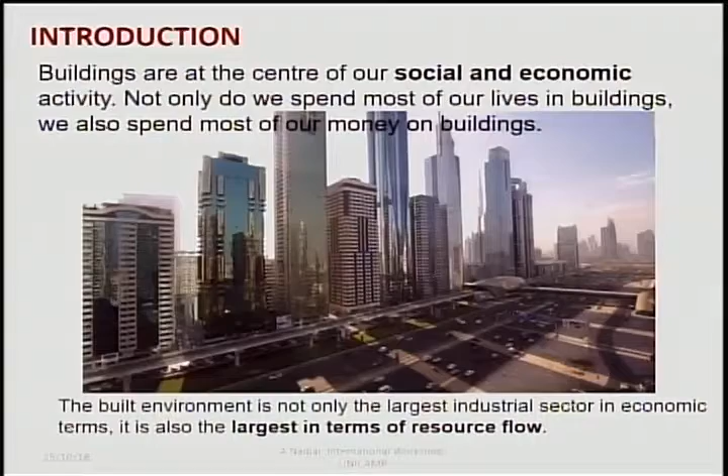If I start with the introductions, buildings are the center of our social, economic activities. Not only we do spend most of our lives in building, but we also spend most of our money in building. The built environment is not only the largest industrial sector in economic terms, it is also the largest in terms of resources flow. So most money goes in the built environment.

If we come to fire, it is recognized as one of the major threats of life and property in many countries. The primary goal of fire protection is to preserve life safety, because life safety is very important and it's a priority. A second goal is to protect the property, safeguard the environment, property, business, running business, activities, and safeguard the environment in order to make it healthy and, of course, important for the generation coming over.

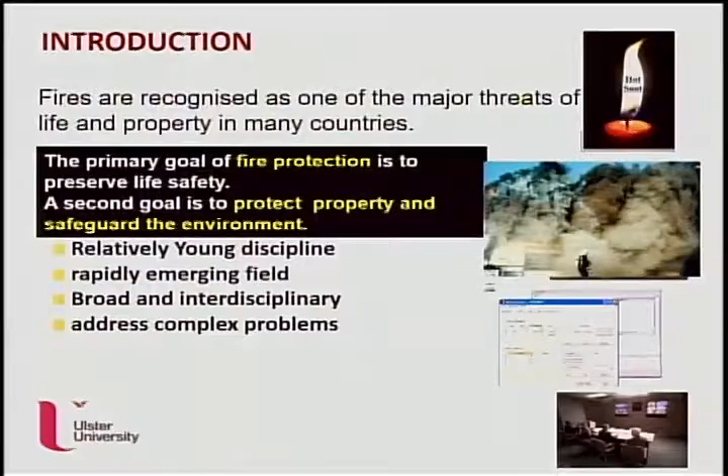If we take fire itself, it's a young discipline, rapidly emerging field, because the fire can cause a lot of damage and can sort of way change the policy of the government. It is broad and interdisciplinary, because it comes from physics, chemistry, engineering application, and addresses complex problems, because you're talking about heat, flame, and also how the fire spreads. The economic impact of fire in buildings has been estimated at 1% of GDP, a vast sum now exceeding 10 billion a year. If you compare earthquakes and flooding to fire, you can see that fire is causing more damage compared to the others, and more investment and protection has to go to building health and fire safety.

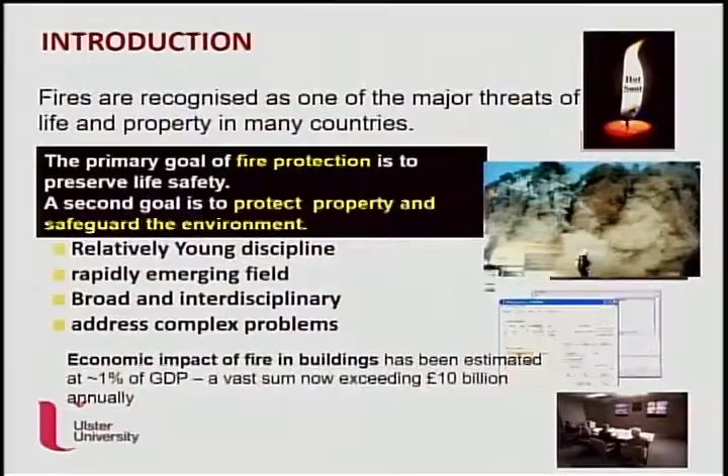I think you are aware about this, and we are all aware about this. So it happened just recently: an incalculable loss of a 200 year old institution, the Museum of Rio, gutted by fire. It is a nice building, but there are so many questions. Why did the fire happen? And how did the fire start, where exactly? What was the ignition? And of course, how did it spread from one block to another. In a way, the fire was localized, but couldn't be constrained by the fire resistance doors, windows, and roof, and of course it spread all over the building.

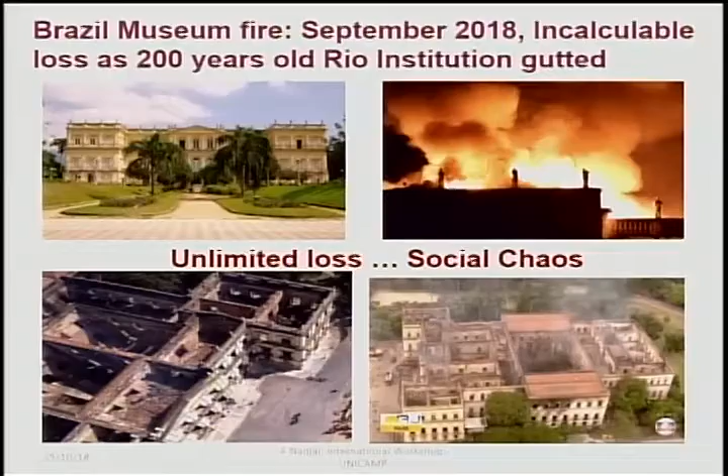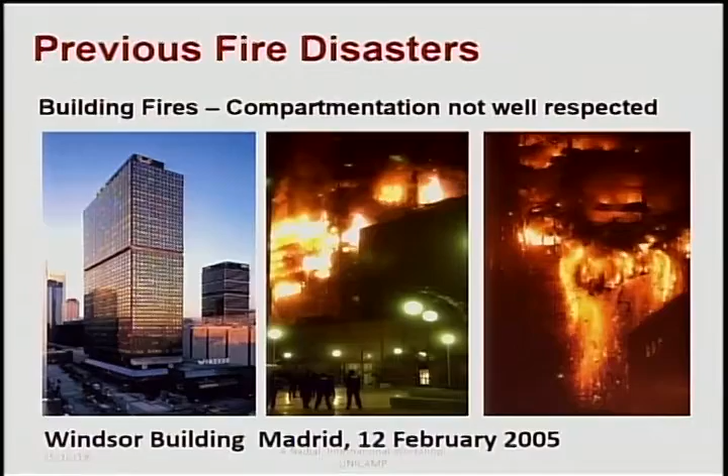If we come to the regulation, I think this is a fire that happened in London in 1666. It is funny to see the 6 3 times here. So you can see the regulation started to recognize things and take action on something else.

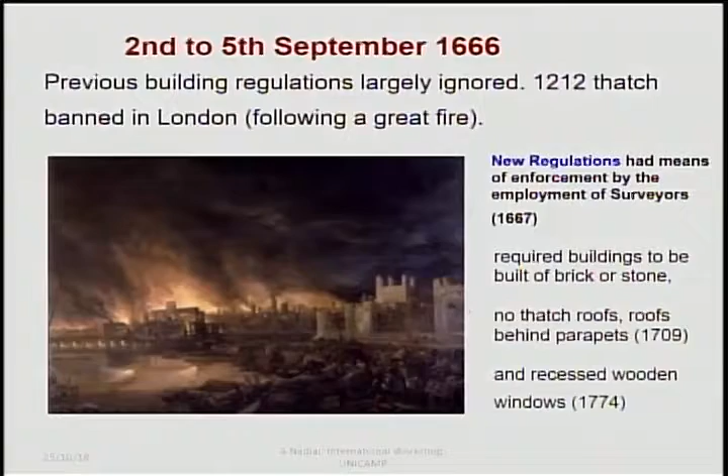You can see in 1212, thatch was banned in London following the Great Fire. The thatch, like in the roof, they put what you call dry leaves or dry branches to make the roof, and this has been banned because the fire can strike any time and spread from one house to another. So the new regulation had means of enforcement by the employment of surveyors in 1667, and required buildings to be built of bricks and stone. So you can see the decision here - long time ago, they knew one of the materials that can stop fire from spreading is stone and bricks. So they decided early on, this is the main material which can save lives.

No thatch roofs behind parapets, and recessed wooden windows from 1774. So you can see to produce a document or a code, it takes some time and it's not straightforward.

Legal liabilities. Regulatory reform, fire safety order, responsible person, fire risk assessment of general fire precautions, competent person, enforcement by fire authority, problems. What about our qualification? What about our skill? What about our competency? Evaluation. So there are so many questions we could ask about what happened in these two buildings, or maybe the previous building as well.

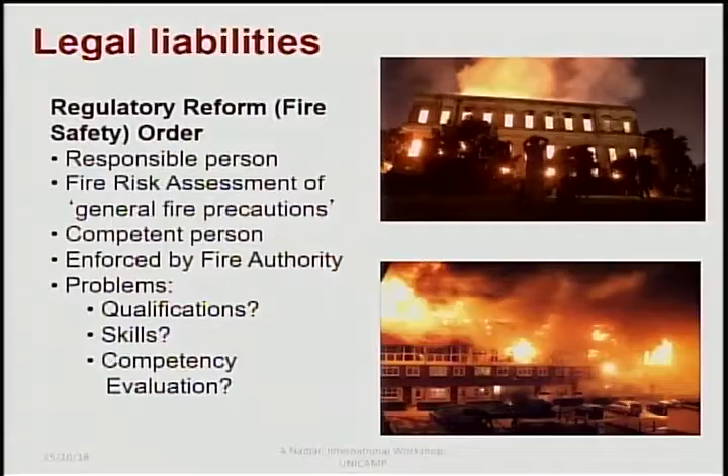As we said, in 1667 the British government decided that masonry and stones would be the main elements to be used in construction. So masonry material has been successfully used for the construction of fire-resisting elements since the need for fire protection became apparent. Just an example here.

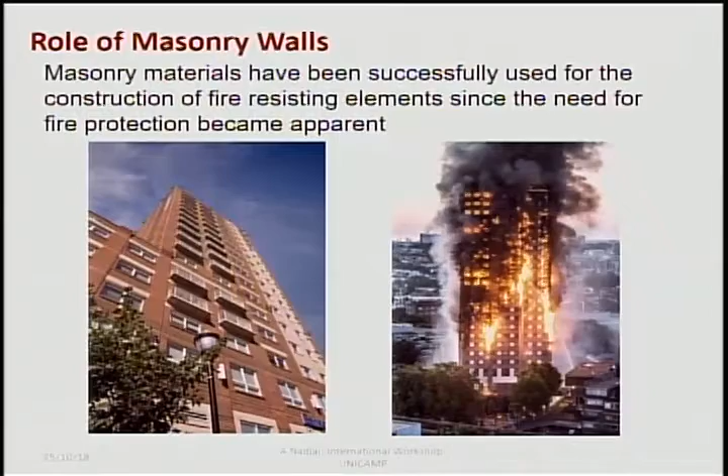The role of masonry is in a compartment - it divides one block from another block, and of course it has been engineered to act as a fire barrier. So fire may strike one room, but it cannot move to the other room because of the barrier of the masonry, serving to compartmentalize the fire, to constrain the fire, so it does not spread.

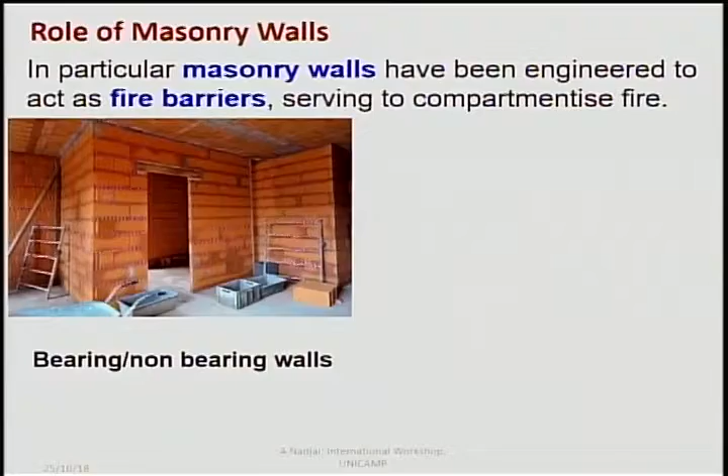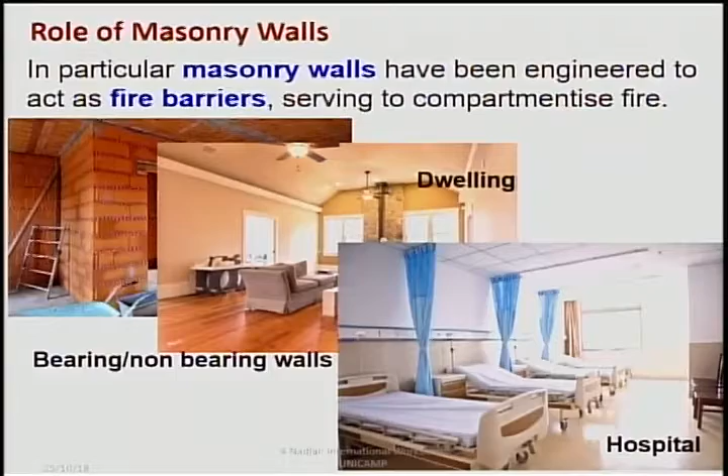What you can see here is what we see in dwellings, and this is what we can see in hospitals. So you can see the different fire loads as well.

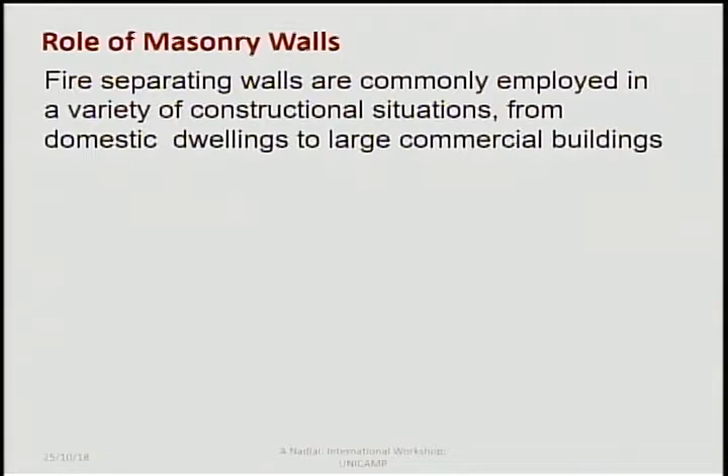So the fire load can be fast, like a library or shopping center, and can be ultra fast, like chemical plants, or it could be medium, or it could be slow. So masonry can be subjected to one of these four scenarios.

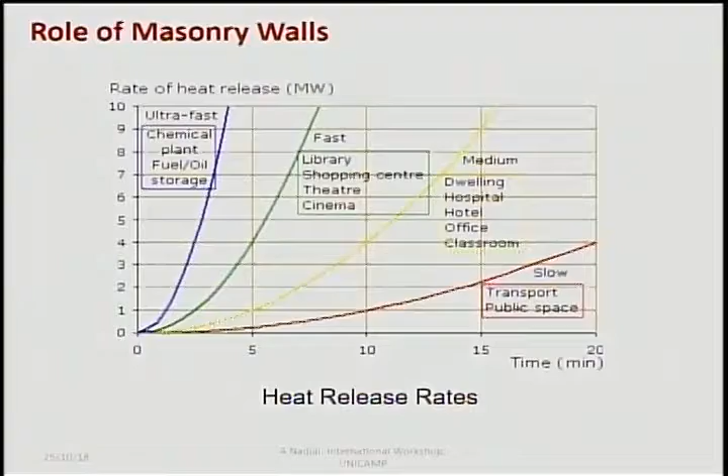And of course, we have to make sure that the type of masonry chosen for plants is not the same as for transportation or dwelling. So it requires special treatment and special work to make sure that the fire cannot spread from one place to another.

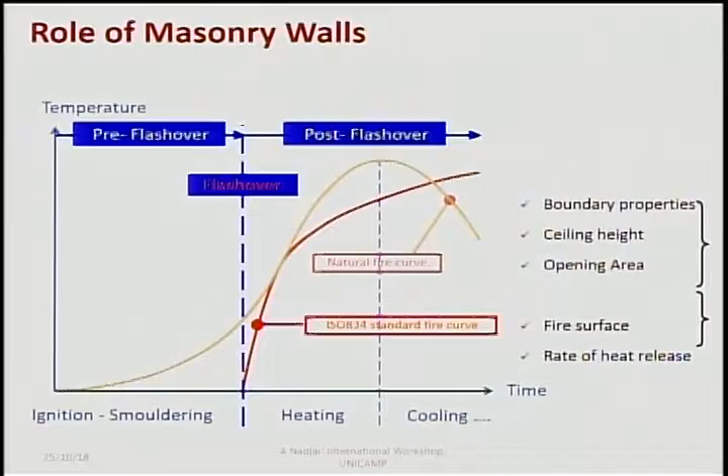The masonry also can sustain the heat from one side to another side. Let's say the early ignition and before the flashover, this is the main concern point where evacuation can take place and people can evacuate the building, and masonry can be one of the safeguards to maintain the evacuation of people. Beyond that, masonry can help the fire authority and fire brigade to intervene during the fire in the compartment.

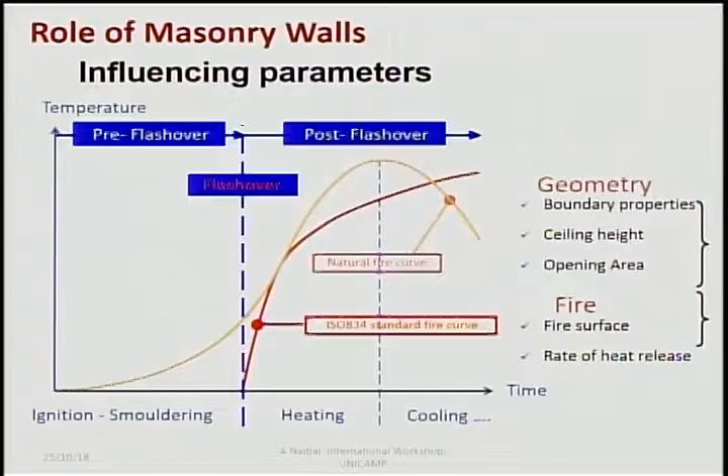But there is one thing else, the cooling is another factor. You could have a problem in the cooling, but not a problem in the heating. There is a lot of secret here which can be developed compared to what we do in the heating.

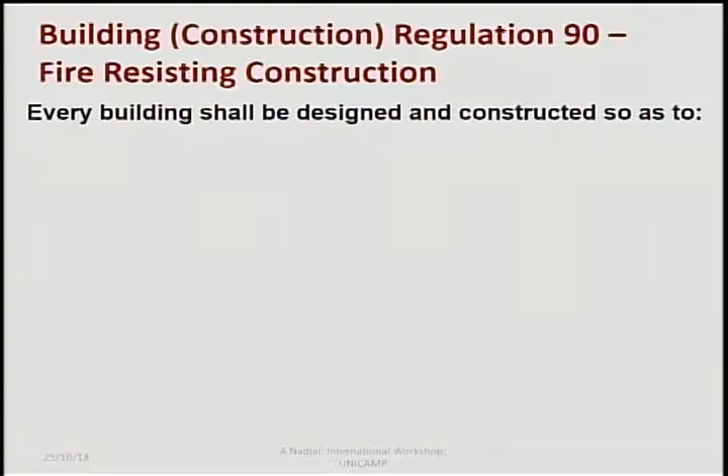If we look at the construction building regulations, this is what it's about. Every building should be designed and constructed so as to inhibit the spread of fire, to stop the spread of fire, provide adequate resistance to the spread of fire and smoke, and account for different uses in a building by compartment walls. So every compartment with different fire loading in a different building has to be treated completely differently, and all the compartmentation walls have to be designed properly to that fire load.

Maintain the stability of the building. This is very important, it's related to the integrity. And provide adequate resistance to the spread of fire over the roof of one building to another, having regard to the position of the building - this is what happened in Rio.

In other words, every building shall be designed and constructed so as to provide adequate resistance to the spread of fire and smoke, because smoke can kill before the fire gets to the person. And at the end of the day, the goal is to maintain the stability of the building.

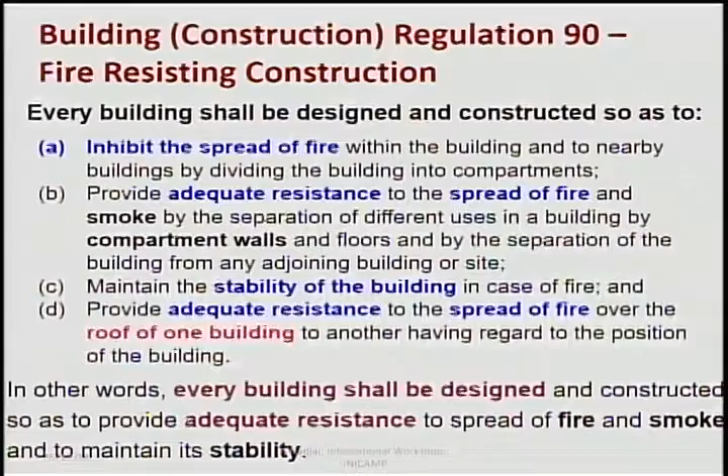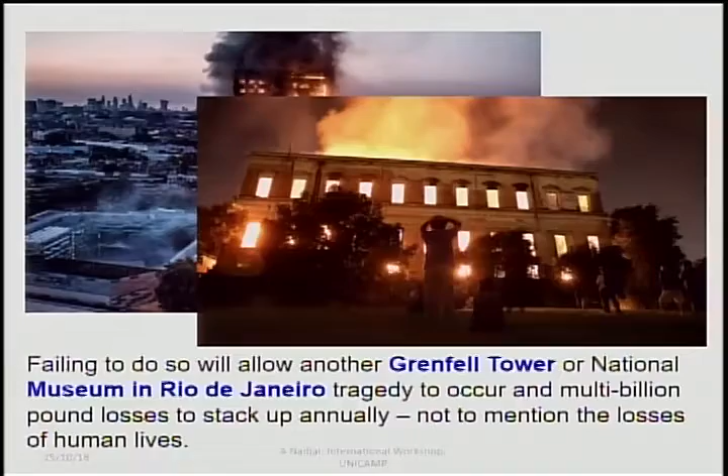Luckily the fire spread in the roof, but it could have been better controlled. The fire spread after the roof to the floor, all the way to the last floor, and that should not happen. One of the main reasons was they were doing some work - refurbishment, construction - so they were expanding the building, and so much mess could occur during construction, and if the fire finds the fire load and the oxygen, the heat can travel so quickly.

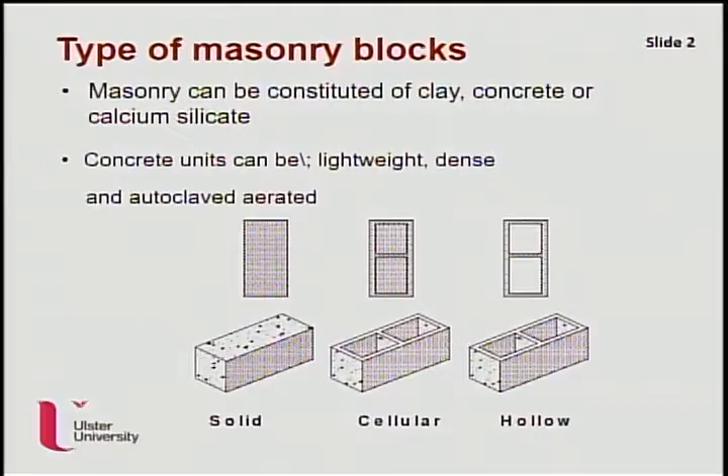There is an investigation into this building, and hopefully it will be decided after my return to Belfast, with the discussion on the 8th of November. We know about the types of masonry - they are solid, cellular, and hollow. This is in relation to blocks, but there are many others in relation to clay.

When you talk about a masonry fire situation, if the wall is unrestrained, this leads to differential thermal expansion of the material, which in turn induces thermal bowing towards the fire. With the hot face of the wall expanding more rapidly than the cooler one, the wall will tend to bow towards the fire, and that's what we see.

Remember, when we test a bearing wall, it has to be free on the two sides. But when you test a non-bearing wall, it has to be restrained on all sides. And of course, we expect a non-bearing wall restrained on all sides could withstand more fire resistance compared to the load-bearing one.

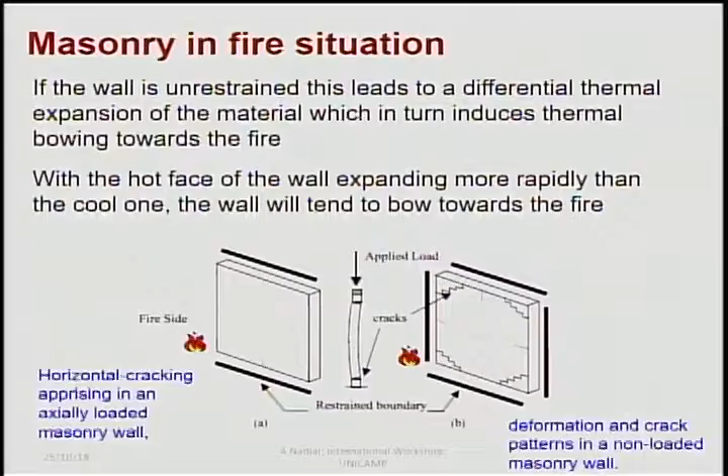If we talk about free bowing, it can affect the stability of the building or the stability of the wall itself.

You've got the hot side and the cold side. So the heat travels by radiation, and next comes conduction. In the simplest way, talking about bowing, the temperature could be considered before the mechanical is affected by the heat. So you can assume a simple equation that the temperature is almost linear, but in reality it is not linear.

So what we can come up with is the simple beam deflection and the cantilever beam deflection. That could be our wall standing, restrained top and bottom, or restrained and free to move from the top, where there is a gap, sort of way.

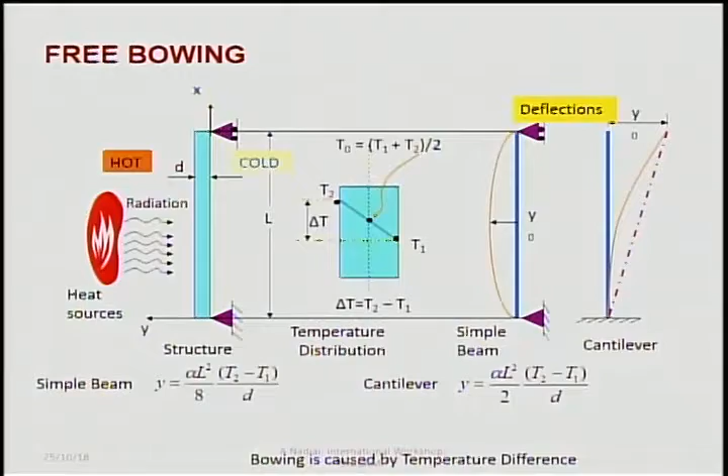When it is restrained bowing, the wall tries to expand, and it has some restraint coming from the top. You can see here, a wall at a certain time cannot remain a non-bearing wall. It becomes bearing with certain loading exerted, as you see with internal forces here.

So you'll have the Euler formula equation. This is an engineering concept here. The stress comes with pi squared E divided by the slenderness squared. So the slenderness is one of the main factors for designing the wall.

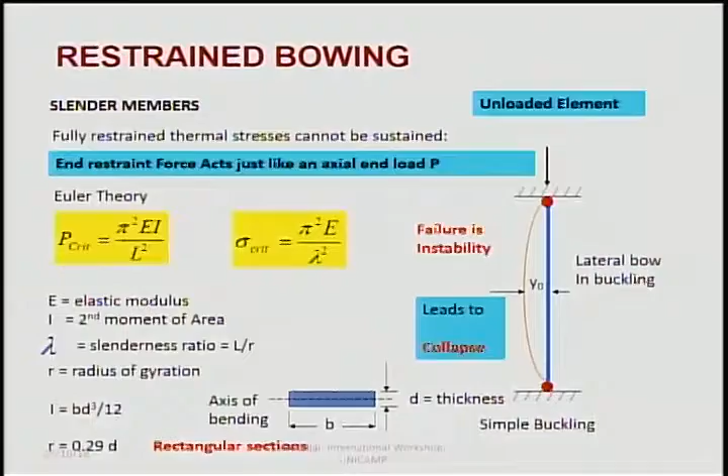Using this engineering concept, we can come up with equations for deflection of a wall, with gap and no gap. You can also include the effect of the load restraint, which is part of the mechanical, because you've got the Young's modulus involved, and you could account for the effect of the mechanical response at the early stage before the exposed face becomes very hot.

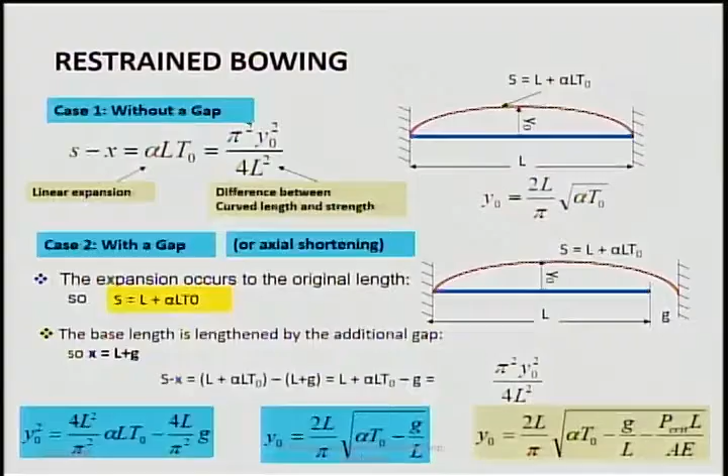Remember, we are talking just about bowing before it becomes very serious, when the fire reaches a certain high temperature, let's say 600 or 700 degrees, which is the flashover.

So we can see that masonry can be a stable element during fire compared to a column and compared to a beam. If a column or a beam fails, masonry, if it's non-bearing, will become bearing. Therefore, we have to be very careful when we design a compartment where there is non-bearing masonry.

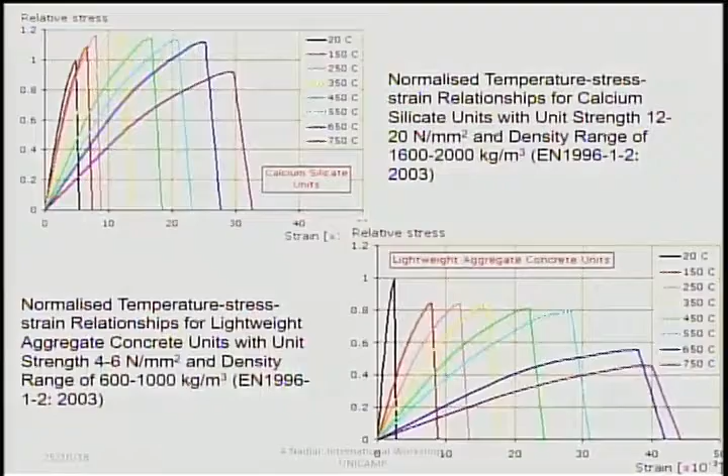Because fire can change the way load is distributed.

If I look at the reduction factor and the thermal properties from different materials used in masonry, we can see there is still not enough information produced in this particular area. So it needs more knowledge and more work in this area.

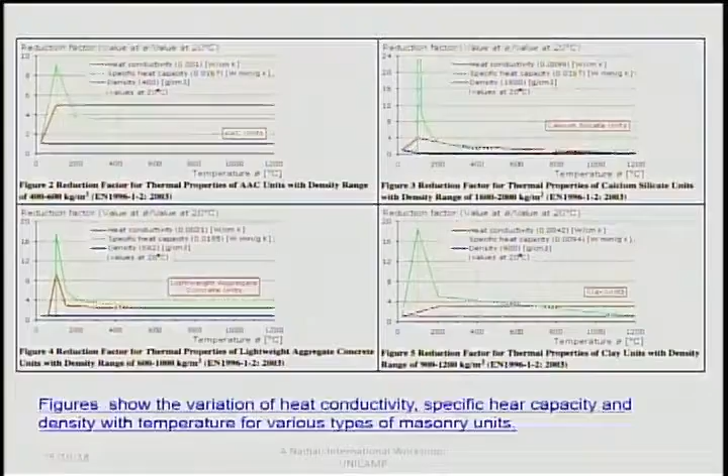Coming to the thermal properties, the Annex D informative of Eurocode EN 1996-1-2:2003 provides the thermal properties of thermal elongation, heat conductivity, specific heat capacity, and density at elevated temperature for some types of masonry.

But what we can extract here is that density is the most important parameter. So density controls the design, which can be applicable to the different materials used in the masonry wall.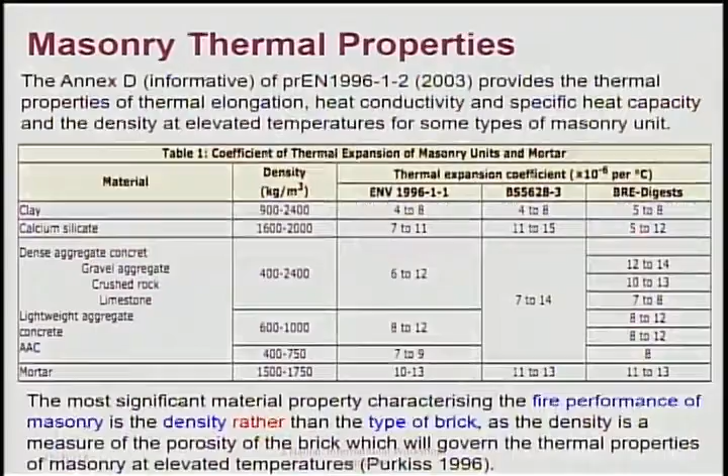So the most significant material property, as I said, characterizing the fire performance of masonry is the density rather than the type of brick, as the density is a measure of the porosity of the brick, which will govern the thermal properties of masonry at elevated temperature. This is from a friend of mine, Purkiss, 1996, who is a retired professor from Aston University in England.

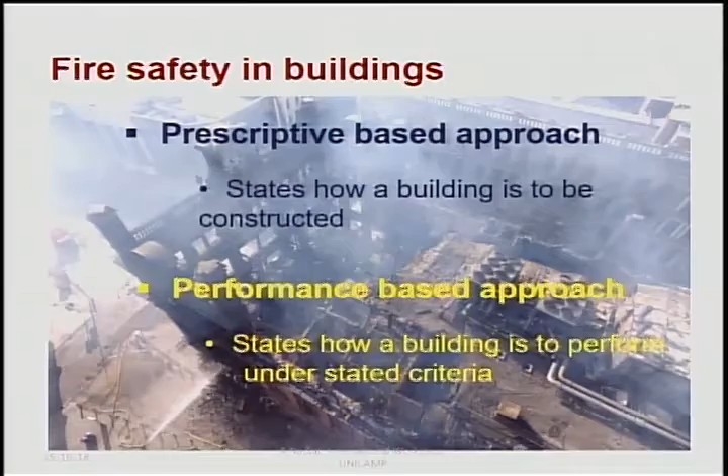When we come to fire safety in buildings, this is what we teach our engineers. There are two things they have to know. There is something called the prescriptive approach, which states how a building is to be constructed. And something else called the performance-based approach, which states how a building is to perform under stated criteria. So here you have to challenge some other things not existing in the prescriptive approach, which is mainly based on experimental testing.

So let's discover what they call the prescriptive approach. It's a set of rules, for example minimum fire resistance for members, so you have to give a minimum fire resistance for a member. Maximum fire compartment size, this is very important. Maximum travel distance, and minimum number of exits, etc. All this is available in document B, and that's what we call the legislatives.

What we call the fire strategy of any building can be found in one document. This document B is used in England and Wales, document C is used in Scotland, and document E is used in Northern Ireland. So you can see different states, different regions do have their own document, but very close to each other. Remember, there is north of Ireland and south of Ireland, but the south uses document B as well.

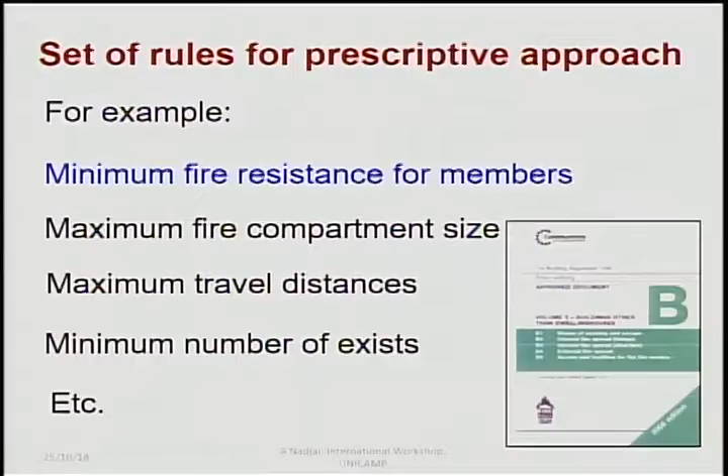So you can see the strategy is very, very important to have a unique document, and this unique document is used by all the consultants who work in fire, and even the fire authority as well, and of course the building control.

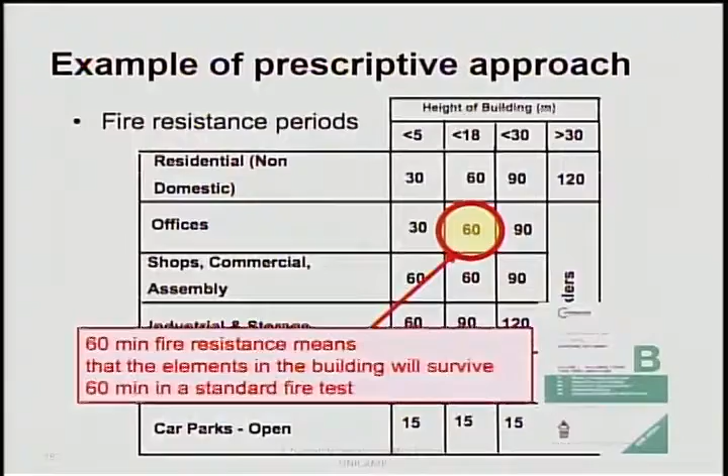So to achieve the above requirement, the construction works must be designed and built in such a way that in the event of an outbreak of fire, you design an element, you test it, and you take into account a compartment. That compartment could be a cinema, could be a theater, so the fire load is different. And you have to check that the element can sustain that period of time in that compartment. So this is the secret in that.

However, that particular element, sometimes you design it for 60 minutes, and the fire could take longer beyond 60 minutes. This could happen, the same thing that happened in Belfast. So the curve, what you call the fire resistance, is exceeded during the fire itself. And of course, you expect some failure of the element, causing the fire to spread or travel.

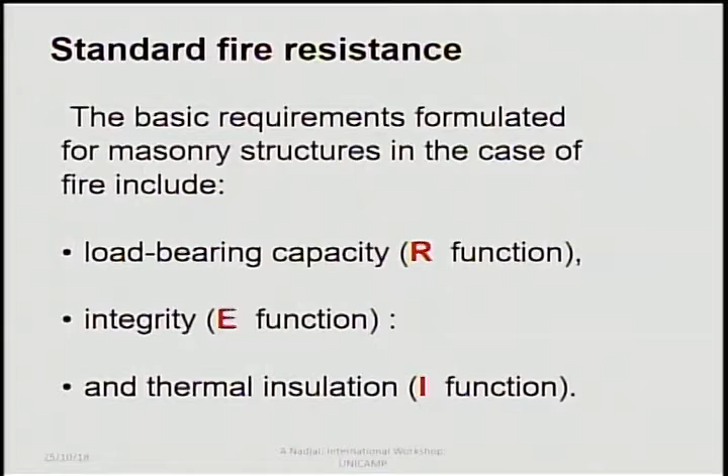Standard fire resistance, the basic requirement formulated for masonry structures in case of fire, includes something called load-bearing capacity, integrity, and insulation. So a load has to be placed on the wall and has to be maintained stable during a period of time, during a heat exposure of, let's say, 30 minutes, 60 minutes and over. The integrity should have no cracks to let the flame cross the wall and spread to the other side of the compartment. And insulation is more or less the same, but the fire can spread from one side to another through the heat and not through the flame. So there are two things here we need to consider.

In practice, this function is connected with the fire resistance of a specific structural element. And you know that the wall itself is a structural element. It could be a non-bearing wall or a bearing wall, because I said during a fire, the non-bearing wall could take some loading and become a bearing wall as well.

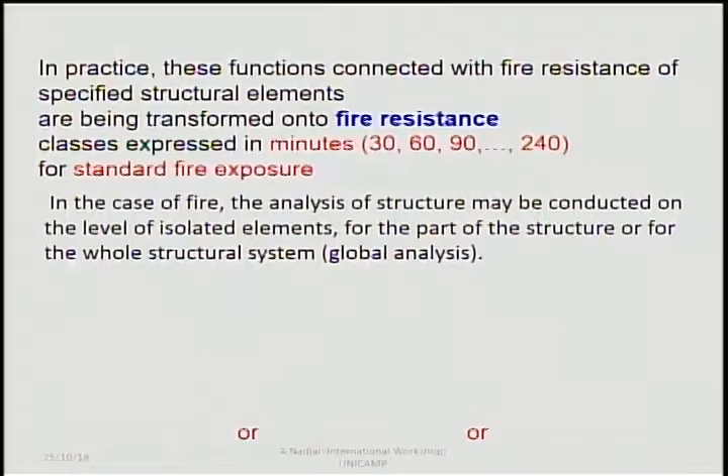In the case of fire, the analysis of structure may be conducted at the level of an isolated element. This is how you test it, and how you take it in compartmentation with a simple model in a 2D subframe, or you take it in a global analysis with a better view, a better performance of how fire spreads from one compartment to another.

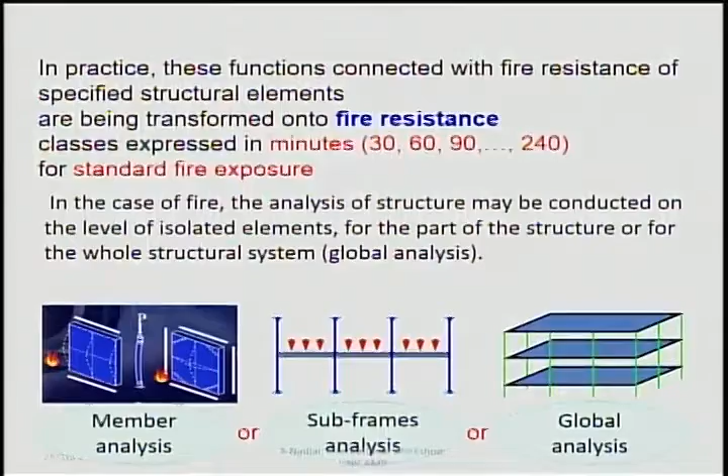The history of fire resistance testing comes from a furnace, dating from the late 1800s, and it has been established for structural fire behaviors since then. In 1917 the US standard started, in 1932 the UK started, in 1933 the US produced another document slightly similar to the British one, and ISO came after that in 1975.

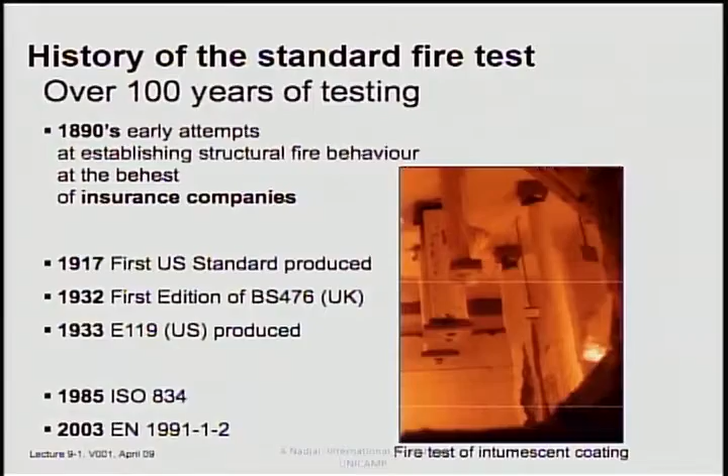ISO is like a curve used all over the world. In 2003 the EN came over, and the difference between the EN and the UK one is that the UK is calibrated by thermocouples inside the furnace, while the EN is calibrated by a plate thermometer. That's the difference between the two, but the curve itself is the same.

When we come to the prescriptive approach and the performance approach, we can see the steps engineers must follow when a wall exists in a compartment: design of building, national fire regulation - that's what you have to understand. Next comes the fire safety requirement and testing elements if required. You can use data and information from tests to make sure your element can sustain a fire for a duration of 60 minutes, 90 minutes, and so on, depending on the need of the compartment inside the building.

The performance approach has some similarities - they also use the regulation and fire safety requirements, but they do calculations, structural temperature modeling, and more advanced analysis. Some tests can be useful to implement in the model, to have more parameters and different criteria, and to analyze the whole structure, part of the structure, or the structural element. So there is similarity, but there is more challenge in this approach.

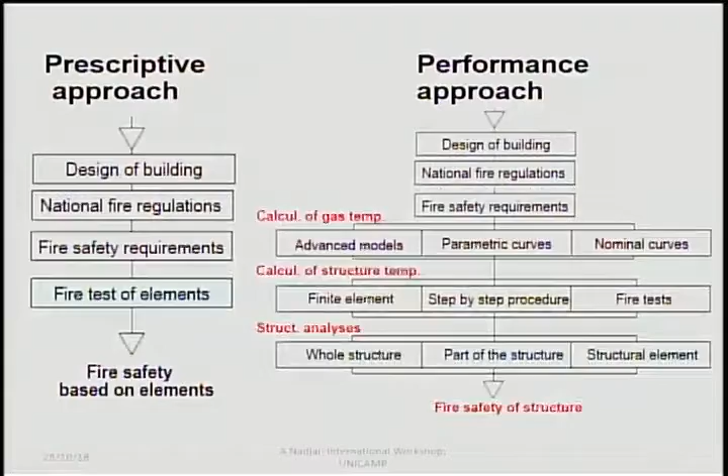The major steps of fire design for any element inside a compartment, considering non-bearing and bearing walls, involve fire behaviors and the thermal response where heat is accumulated in the wall to stop heat traveling - this is insulation - and integrity, which stops flame traveling from the other side. Next comes the mechanical effect, because there is deterioration of the load, mainly on what we call the standing wall, since part of it disintegrates and you end up with what we call effective thickness rather than the full thickness.

The fire behaviors can start with a nominal fire curve. This nominal fire curve is what we call the normal standard, versus real fire scenarios, where you take into consideration the ignition, the flashover, and the cooling as well.

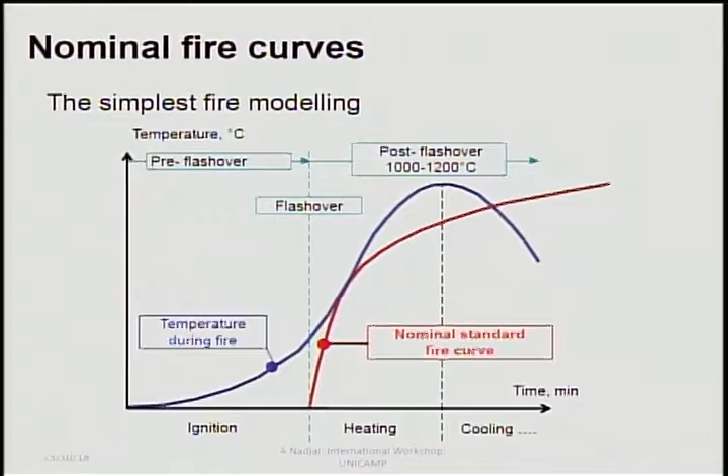The nominal standard fire curve for the furnace doesn't consider evacuation timing or ignition, and the flashover can be more or less the same - it's only heating with no cooling, since the fire load sort of finishes at a certain time. The nominal standard can differ from building to building, depending on the fire load.

It can be a hydrocarbon fire, such as in a car park sometimes, or it can be an external fire curve - also in a car park scenario, but it can be open or closed, or in industrial plantation. This is what we use for building construction.

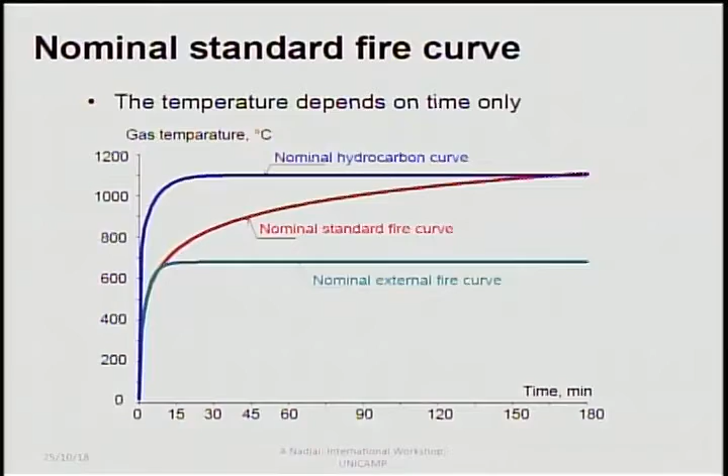It has limitations - it's not based on real fire data, and test repeatability is difficult, especially in masonry. There's no cooling phase, uniform heating is used, and gas temperature is used which isn't fair representation. As I said, it's uniform temperature, but in a real fire scenario, if the fire starts somewhere in a corner, you cannot have the same heat all over the area. But it's widely used and can be useful for crudely comparing products.

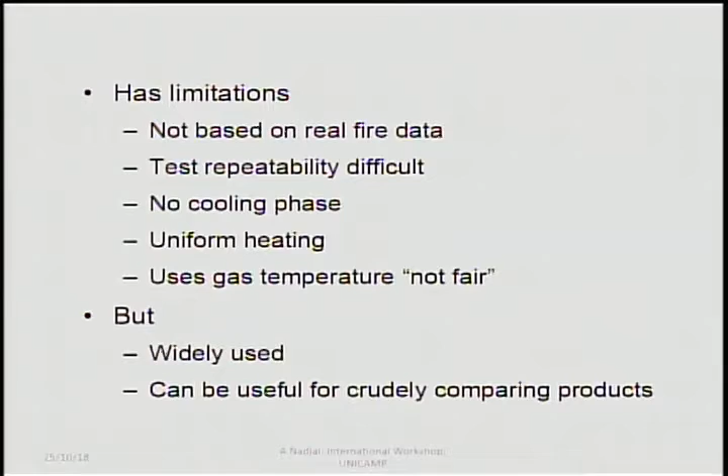We know the standard fire curve started so many years ago, and we're still using it over 100 years later. So do we have to keep it or do we have to change it? There is a lot of discussion about that. So the nominal fire curve - you now know what it's about.

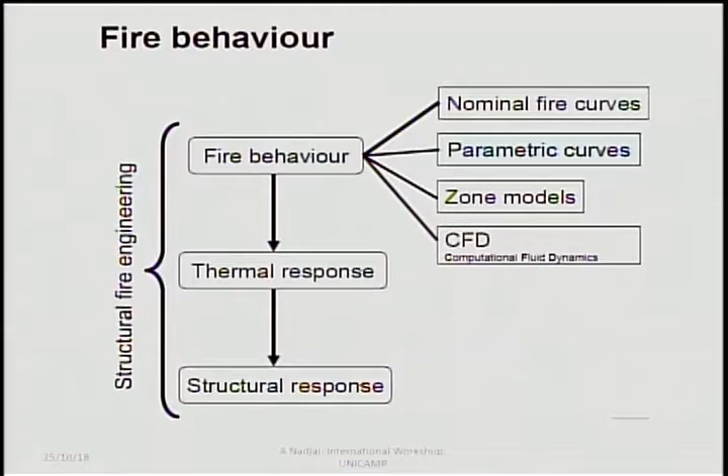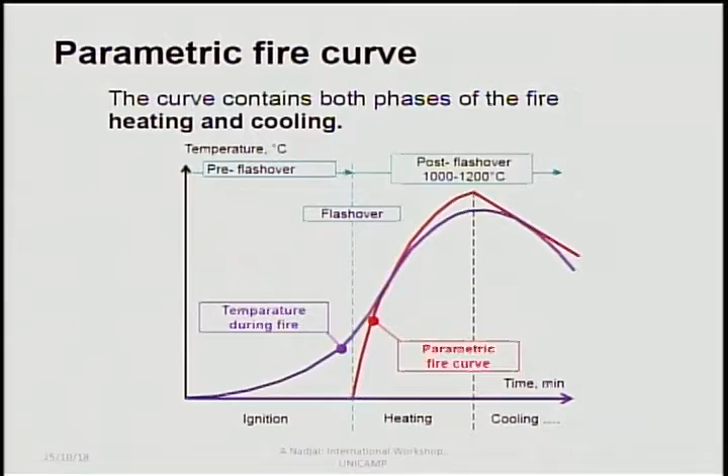There is something that came out in Europe called the parametric fire curve. This parametric fire curve combines the real fire scenario and the standard fire scenario - you can see this is the standard fire curve plus the cooling as well. So combinations have been implemented to understand the cooling stage in the real fire scenario, which was not considered in the previous nominal fire curve. This can be very useful.

Assumptions in the parametric fire curve: no heat build-up in the pre-flashover phase of fire, same as the standard fire. Temperature is uniform in the compartment, uniform heat transfer coefficient at compartment boundaries, and all combustion takes place in the compartment.

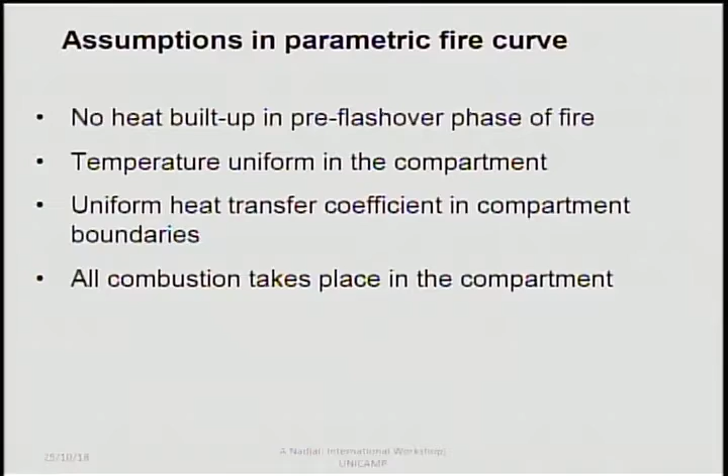The limits of the parametric fire curve calculation exist in Annex A, EN 1991-1-2. The size of the compartment is limited to 500 meters square. The openings are in the walls, not in the roofs. Maximum height you can use is 4 meters. The fire load density you can use is 50 to 1,000 megajoules per meter square, which is about 3.5 to 70 kilograms of timber per meter square area—that's cellulosic type fire load. So there are limitations, but still a lot of work to do in compartmentation.

We can see that it considers the fire load, the opening, the geometry of the compartment, and the thermal properties of the lining walling element. You have the density, the specific heat, and the thermal conductivity. This is basically what wall is needed in the compartment, depending on density, specific heat, and thermal conductivity. This is the main parameter for all researchers working on masonry walls, bearing or non-bearing.

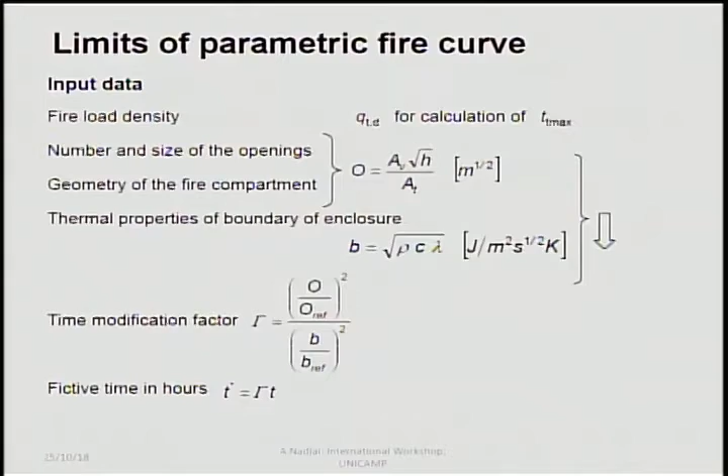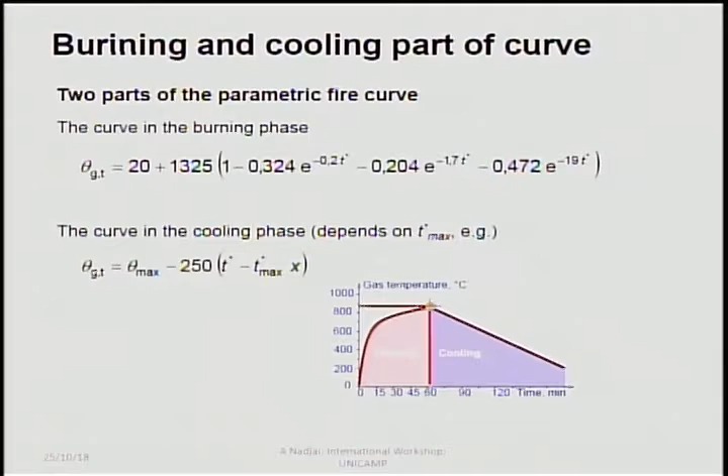The burning and cooling parts of the curve are taken into consideration. The burning phase, and of course the cooling phase, can be done in this parametric fire curve, which is quite useful but very limited in the size of the compartment.

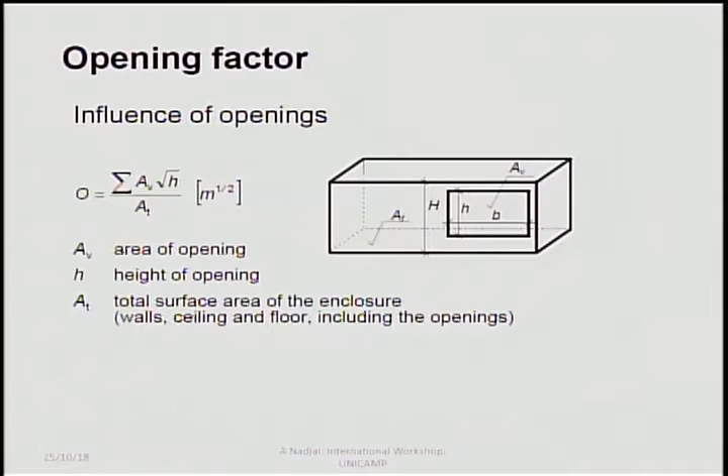That's very important in relation to the opening, because the opening can make two things happen: it can make the fire controlled by ventilation, or controlled by the fire load. If it's controlled by ventilation, the fire can be severe and you can have flashover. However, if controlled by fire load, the fire could be slow because the compartment is so big—let's say an airport where the ceiling is sometimes 5, 10, 15 meters—so you're not expecting flashover to happen.

So we have to understand the fire—how it becomes localized, and how it spreads, travels, and becomes engulfed. We use the curve which is mainly based on extreme fire, but we're not using how the fire spreads, starts, travels, and becomes engulfed. Eurocode is not considering that. There is a lack of information there, and I will come to that at the end.

Now we can see the influence of the opening factor. If you take different opening factors, you can see that the load, the duration of the fire, is different from one opening to another. So this particular opening can make a big difference in how the fire behaves in the compartment and how it's constrained by the wall inside that compartment.

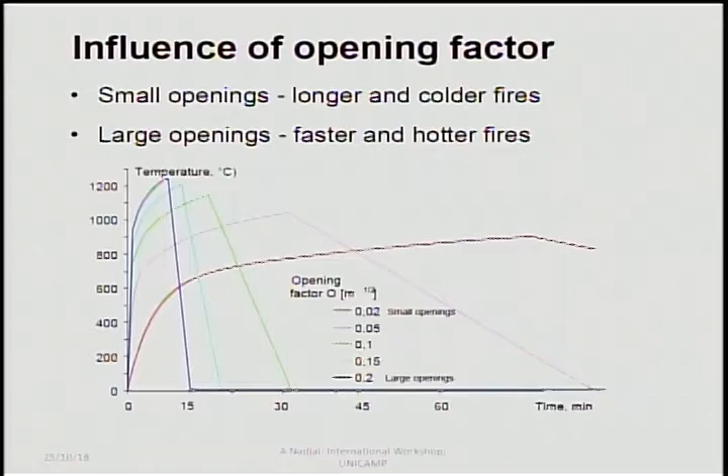The other influence is the density. We know the density of the wall, in the Eurocode or any other code, has an influence on the behavior of the wall. You can see that density from 200 to 1,000 can make a big difference. So we have to understand and take all the parameters together, and study very carefully the compartmentation and the heat in the compartmentation due to geometry, the opening, and the fire load, and take that into consideration before we design our wall inside that building.

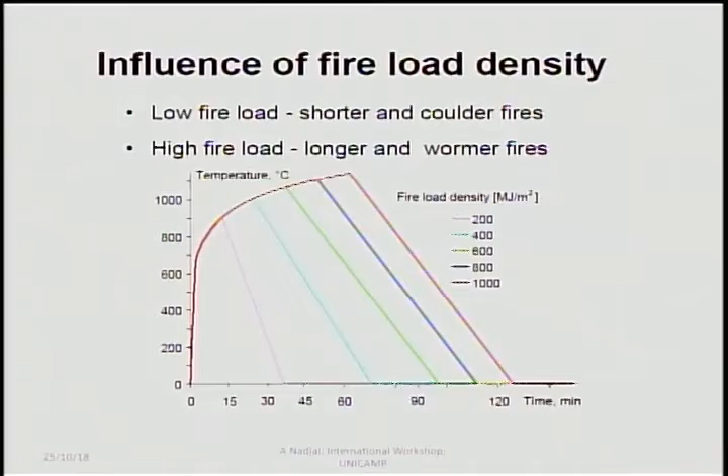You can see here the boundary condition, which we talked about. This boundary condition usually applies to the wall. It can be bearing and non-bearing as well, which has density, specific heat, and thermal conductivity. These are the main parameters that apply to the boundary all over the compartment—to the ceiling, the ground, and the wall. Sometimes the weakness can be in the ceiling, and the fire can travel through the cavity to the other side—possibly this is what happened at the Rio, but I don't have enough information on that particular building.

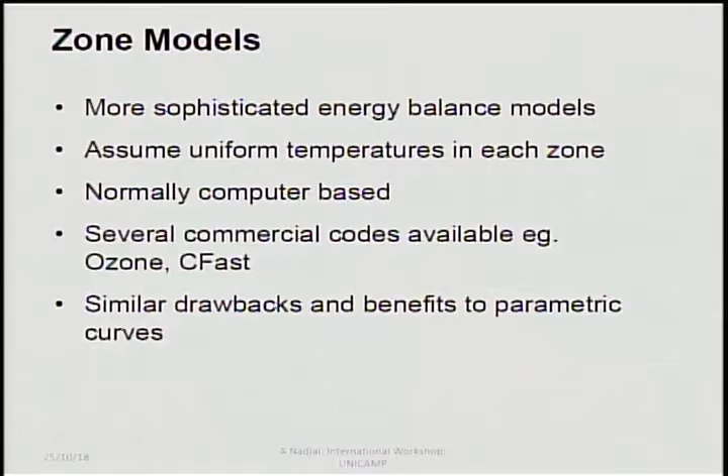There is something else called the zone model, which I don't think we've discussed much in this place. The zone model is a sophisticated energy balance model that assumes uniform temperature in each zone, normally computer-based. Several commercial codes are available, for example OZone and CFAST. CFAST is mainly related to smoke movement, and OZone is mainly related to heat at the boundary of your compartment. It has similar drawbacks and benefits to the parametric curve.

OZone is used a lot in Europe nowadays and is being developed, and I will come to that point. As I spoke to Perkison, I completed a book about the OZone model and also about how fire is controlled by localized fire. I will explain what I mean by localized fire.

There is something in the Eurocode, but they never considered a vertical element in relation to what you call the localized fire—open, with no vertical element. That vertical element can be a column or a wall itself, but the fire can be at a distance or inside it, and this is not considered in the Eurocode. Nowadays, it is considered after a big project in Europe with my partner, and we came up with a solution. I will send Perkison the new legislation I created for all of Ireland, plus the book. Of course, the consultant can make a better design of offices and a better design of industrial plants, and you'll see there are so many examples which can be used, even with OZone itself.

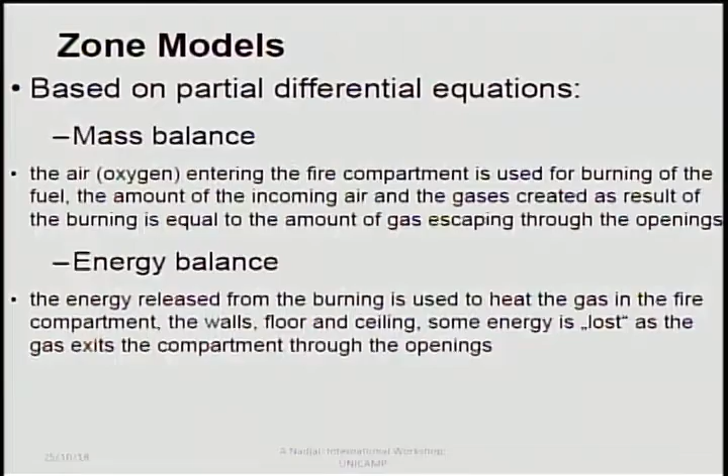Coming to fire behavior in the zone models, as we discussed, it's a balance between the mass balance and the energy balance. Am I okay with time? Okay.

The next challenge could be CFD. CFD could be useful, but only if you have the right heat release rate, because the fire load produces heat measured by heat release rate, depending on the smoke and oxygen involved. That smoke and oxygen are elements to be implemented in the CFD in order to understand how smoke travels and accumulates, and how heat travels from one part to another. So the heat release rate is the most critical factor in creating a good CFD model. If you don't have the heat release rate, it will be very, very difficult—it's like a lottery. You can be on the right way, or you can be on the wrong way.

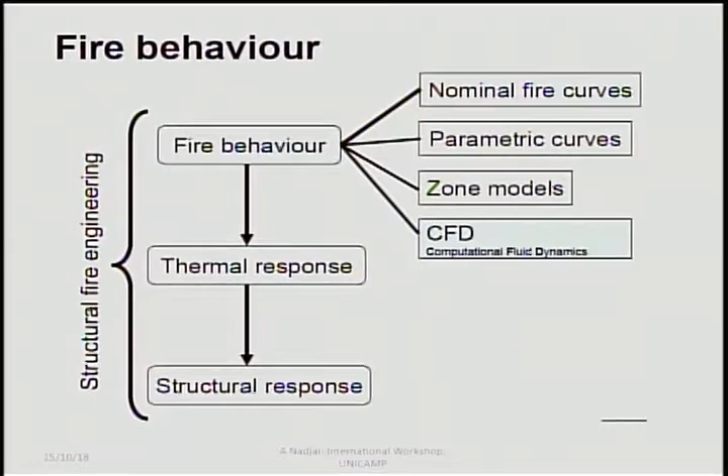CFD modeling is computational fluid dynamics. It can predict a huge range of phenomena, but it's difficult to use due to many uncertainties in input variables. That's what I said about the carbon monoxide coming from the particular fire load under fire, and the oxygen inside the compartment itself. There's still more research needed in this area.

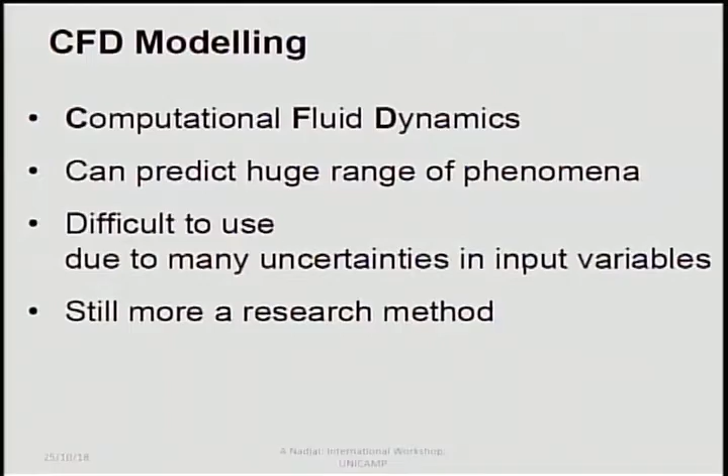So we can conclude about the performance-based approach: we must continue to promote the performance-based approach, otherwise we'll rely on luck—simple as that.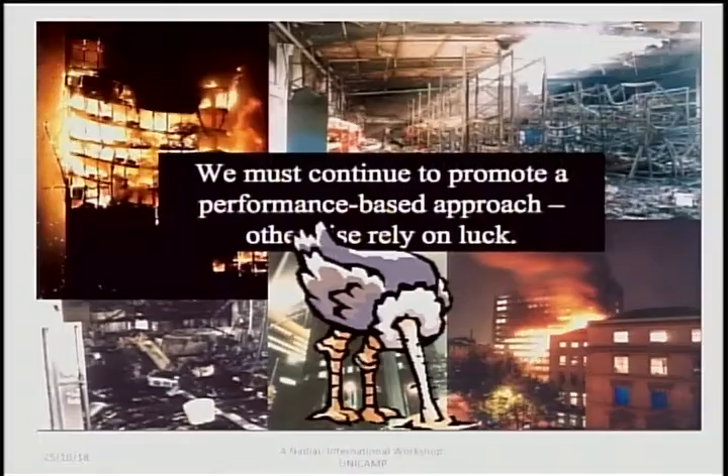The procedures for determining fire load capacity of masonry walls according to the Eurocode. So we've seen how design behaviors inside the building work from the prescriptive approach and from the performance-based approach. Now let's see what the code itself says about it.

The behavior of a masonry wall at high temperature is conditioned by various factors. The masonry unit material, because there are so many types and they differ from country to country. And the type of masonry unit itself could be solid or hollow, and the thickness is one of the main factors in that particular type of masonry.

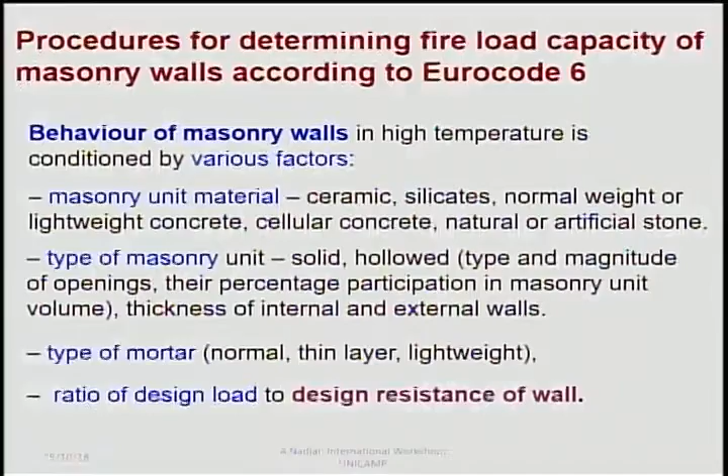The mortar is another element which can make a difference in the unit altogether, especially for lightweight masonry. And the ratio of design load—the loading ratio—is an element to be considered for load-bearing walls, and every load ratio has a different time of fire resistance.

These are the main parameters: thickness, and eccentricity in a sense, because you have an effective thickness at certain times when it's load-bearing, which can cause eccentric loading. Density is also an important element for the behavior of the masonry wall. The type of wall structure could be single leaf, cavity, load-bearing, or non-load-bearing.

When you go to the Eurocode, you need to be careful which table you use. It's not one single table that applies to every particular load-bearing wall—every table is designed for a specific load-bearing or non-load-bearing case. It could be separating or non-separating. You have to use the proper table. They look the same, but they're not the same, so you need to be very careful which table you use.

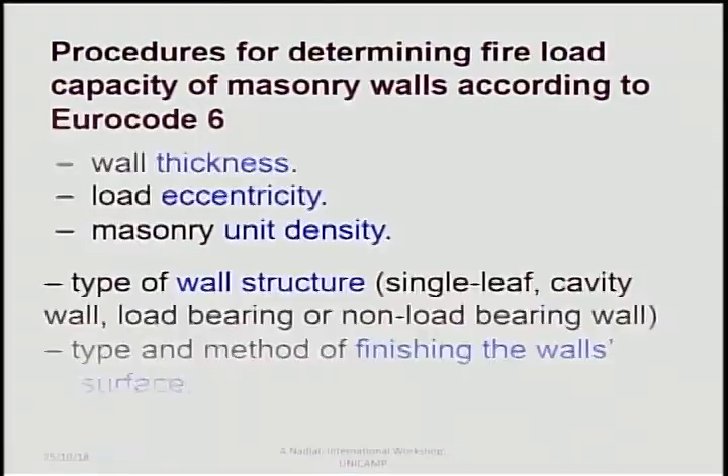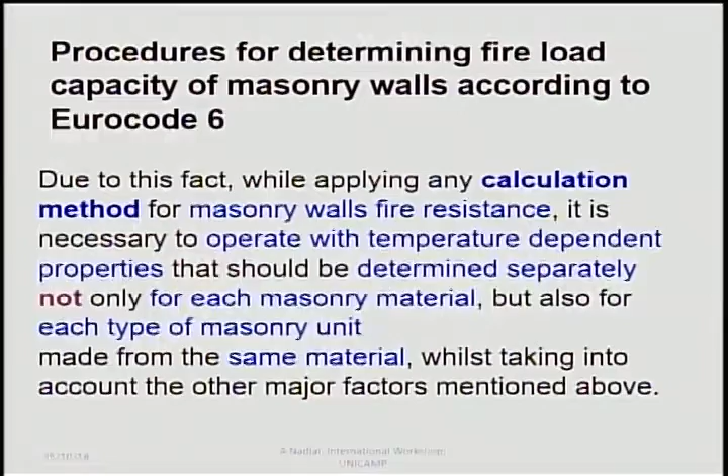The tabulated data for determining the fire resistance of masonry wall is available in Appendix B, EN 1996-1-2. The table gives a minimum thickness of wall necessary to achieve the required fire resistance. For specific types of wall and determined way of loading, you have to be very careful which table you use.

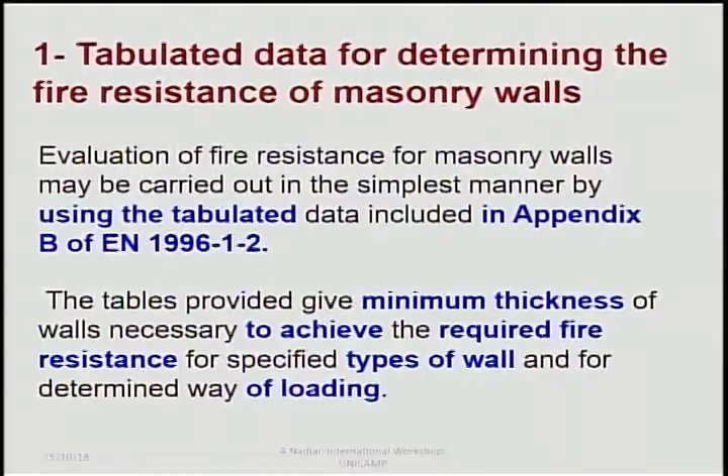You can see for category 1, you have the ceramic, the silicate, normal weight concrete and others. You got alpha, which is the ratio between the design loading in fire and design loading in cold condition before fire is taken into consideration. The values in between are from the protocol of test, so you could be sitting between these two values. If your alpha, the load ratio, is less than or equal to 0.6, you can use, say, a thickness of 140, as shown here and here.

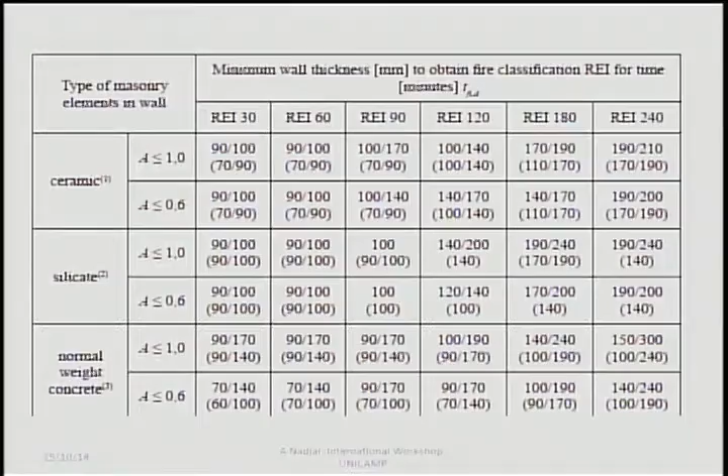But what you see here in brackets is mainly where your wall has finishing material on both sides. Say 10 millimeters from each side gives you 90. You can see they finish more or less the same fire resistance for load bearing. That's how the protocol of test brought this fire resistance - thinner with finishing could be the same as thicker with no finishing. But when you consider the tabulated values, you have to consider no finishing, basically this line.

You can see the category is for lightweight concrete, cellular concrete, and of course cellular concrete depending on the density.

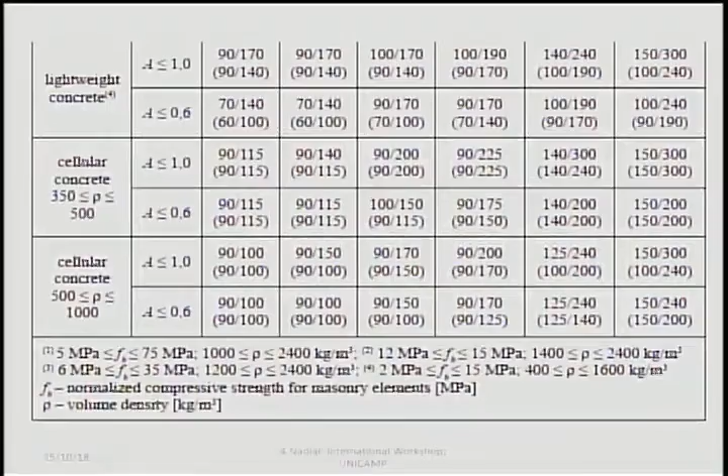The calculation method for masonry walls for fire resistance in EN 1996-1-2 includes two calculation methods for fire resistance determination: simplified, given in Appendix C, and advanced, in Appendix D. In the UK, they don't accept this simplified method - they rely on the tabulated section. The advanced method, depending on the parameters, creates a better understanding of fire when you use a finite element model.

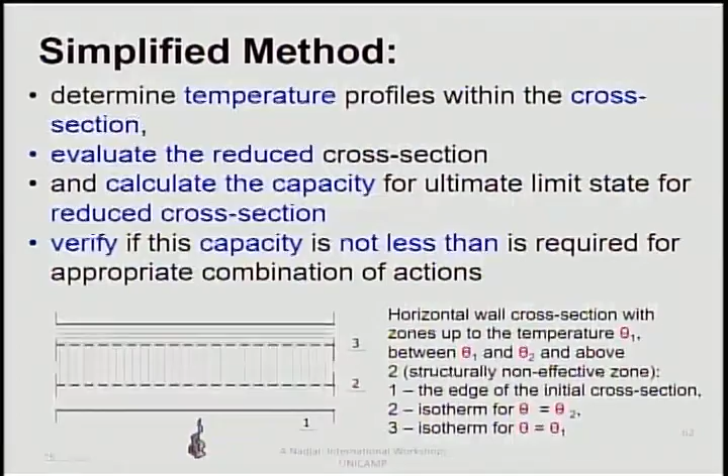But the simplified method goes step by step, as we call it: determine the temperature profile across the section, evaluate the reduced cross-section, which is a function of the effective thickness, calculate the capacity of the reduced cross-section, and verify this capacity is not less than what is required for the appropriate combination of actions. All these values are available in the simplified approach, and there is a table for that.

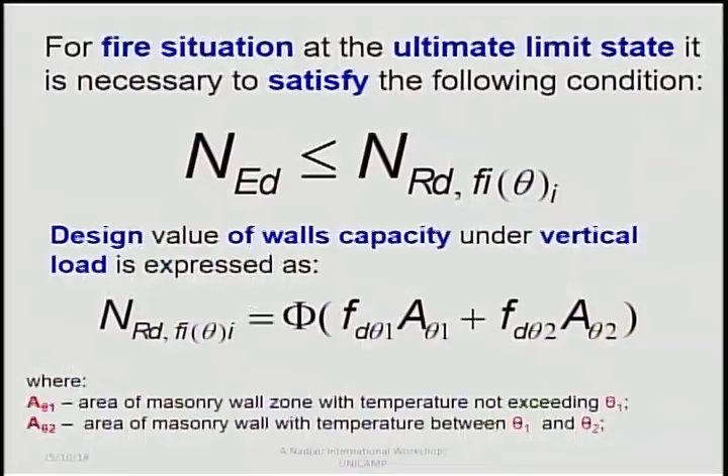So you got the fire situation - the ultimate limit state should satisfy the conditions. You see the slenderness and the area, which is a function of the thickness per meter or per millimeter, and of course you have the strength, which is important to be considered.

I have to go a little quicker here because I don't have time to take from the other speakers. You have a table here to get the values of the temperature distribution from one side to another. And of course, when the temperature increases, it will affect the strength, so the strength has to be considered at that particular time and temperature.

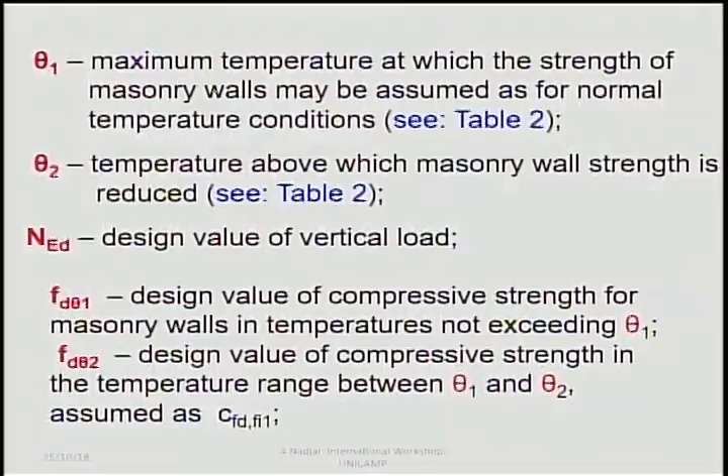The eccentricity is affected due to the thickness working at a certain time - not all of it - and there is an effective thickness considered, which you can calculate and check if it's within the limit boundary, to make sure it can sustain the loading applied on top of the wall.